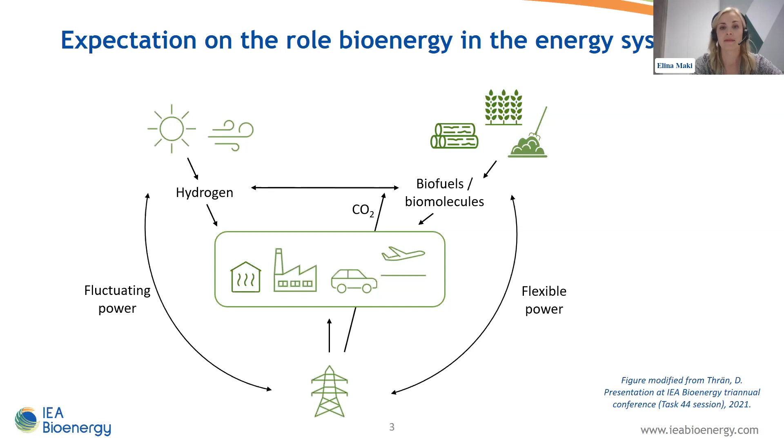It must be noted that this picture can look very different in different countries, because we have different energy systems, different market mechanisms, different biomass availabilities, and also different climate strategies. So the picture varies between countries, and as you can see, bioenergy can provide different services to the system.

When screening different technical options at Task 44 to provide flexibility from biomass, we ended up with 3 different categories. First, we have short-term flexibility services from bioenergy. Under this, we have backup or peak generation, when bioenergy can substitute or complement renewable energy production from variable resources when there is not enough available during a given time.

Then on the other hand, we also have times when there is too much renewable energy production available compared to consumption, and bioenergy can step in with negative ancillary services. So bioenergy can actually uptake electricity when there is more available than needed.

Flexible bioenergy goes way beyond short and mid-term flexibility services, and we also have long-term flexibility services from bioenergy. This basically means biomass-based energy carriers, which can be stored even seasonally and transported within the existing infrastructure.

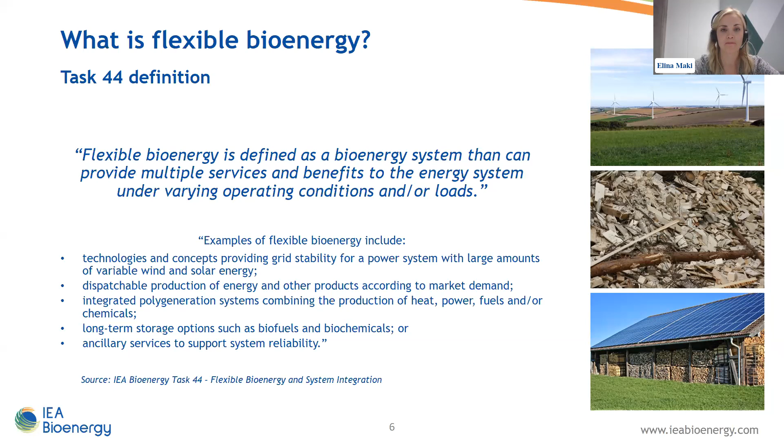With this, I will hand back to Jaap, and I'm looking forward to the discussion and presentations, as it's very important to bring together the systemic view and the end user perspectives with the technical solutions. Thank you.

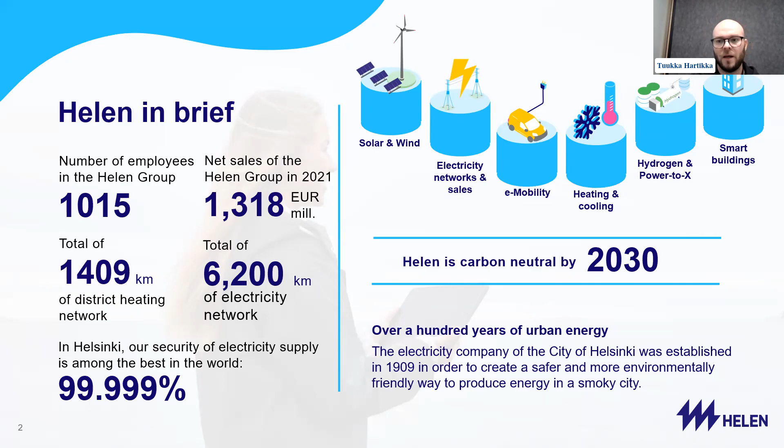If we use an electrolyzer to produce hydrogen, we always produce heat as well. Roughly 1/3 of the electricity that we put into the system comes out as heat, and this heat could be utilized in district heating networks. If you have a low temperature district heating network, you could even use the heat as such without a heat pump, or if you need to boost it up, you can have a smaller heat pump to boost up the temperature. But then you have one piece of the puzzle. So you have the hydrogen, and then you need the CO2, which you would capture from a biomass plant. With these two building blocks, you have basically the option to produce almost anything you need.

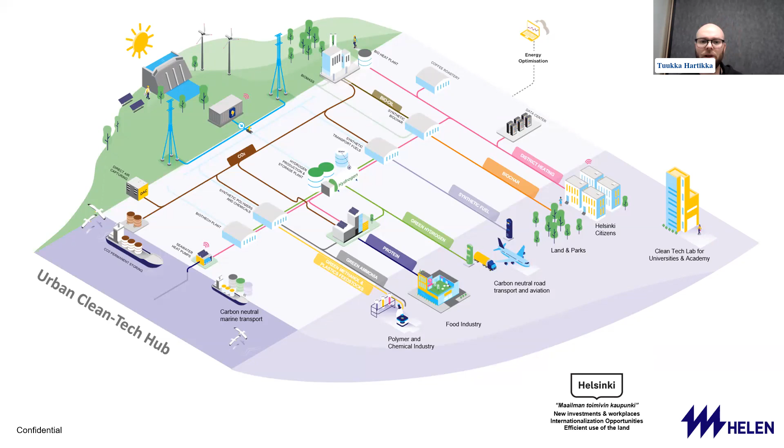And we see that especially hard to abate sectors like aviation and marine are very important sectors to have synthetic fuels for. We could also produce food from these ingredients, so protein. There's an extremely interesting startup in Finland called Solar Foods that can produce protein called solein from CO2 and hydrogen. And then, of course, you have the chemical industry that you can also apply with these pieces of the puzzle. This all could happen within one country as well, so you don't need such long supply chains as you need today. But what you need is flexibility and sector coupling. I will now present one example of how we see the topic and a couple of the challenges in this sphere as well.

First of all, to produce hydrogen with electrolysis, you of course need electricity, a lot of it. If we take an example where we have a hydrogen production unit, a 100 megawatt alkaline electrolyzer, and you would like to run it basically 8,000 hours per year, because typically hydrogen users need a quite continuous flow of hydrogen, what you would need is 280 megawatts of wind power for this system.

In Finland, the capacity factor is about 35%, so to cover the whole energy need, you need 2.8 times the power that the electrolyzer requires. What you would also produce is 30 megawatt hours of heat every hour, which is quite usable in a district heating network.

Why I mention that only 65% of the hydrogen is green is because of EU legislation, where you would most likely need to match the wind or solar energy with the hydrogen production hour by hour. So you need to basically oversize your wind assets at certain times, and then you have to sell the excess power to the grid, and you won't be able to get 100% green hydrogen according to these rules.

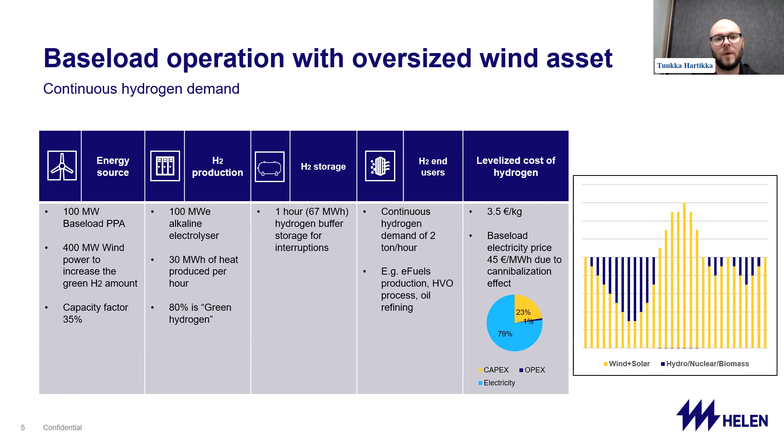If we take a third option, where we'd like to get 100% green hydrogen, producing hydrogen all the time, we would need roughly 550 megawatts of wind power supply and oversize the electrolyzer, almost doubling it, but it would only run half of the time. We would also need hydrogen storage for 11 days to cover non-windy periods in the summertime, and this would add to the cost tremendously.

With this option, we can provide 2 tons per hour of hydrogen, but the cost would go up to 6.7 euros a kilo. Here you can see that the capex cost is now what influences the total cost of hydrogen the most, with electricity being a much smaller price component.

So what this basically shows is that we need balancing power as well. We need something else together with wind and solar to balance the grid, and that will be very cost efficient. Also, the regulation shouldn't discriminate against non-fossil sources of electricity which you could use for producing hydrogen as well.

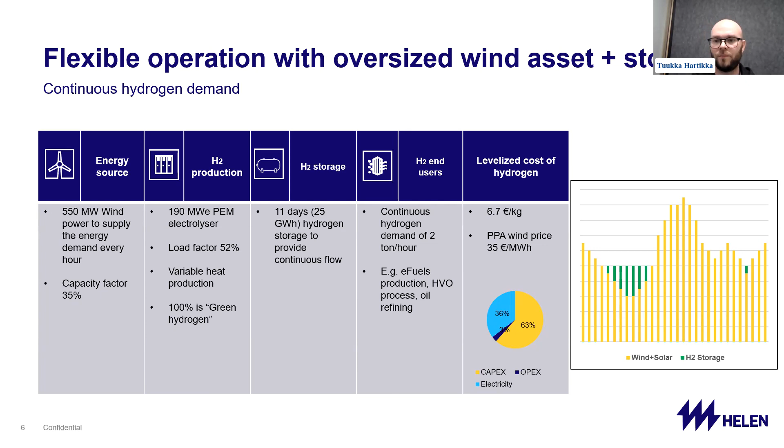That was my example, and now I just briefly want to advertise our project that we are now developing. It's called 3H2, Helsinki Hydrogen Hub, and we are developing this project in Helsinki. We have a small solar park connected to an electrolyzer, and the electrolyzer will also be connected to the grid.

The produced hydrogen will be stored in a low pressure storage, and the hydrogen's main use will be for heavy duty traffic, so there will be a hydrogen refueling station as well. But because we want to increase flexibility, we also have a small terminal to import and export hydrogen, and also a fuel cell to provide grid balancing services when that makes the most value.

All the heat produced in this system from the electrolyzer, the fuel cells, and from compressing will be utilized in a district heating network with a heat pump. By this, we can increase the total energy efficiency to about 90%. This will significantly improve the business case and the efficiency of the system by utilizing all the waste, and we hope this system we're now building will be up and running by 2024.

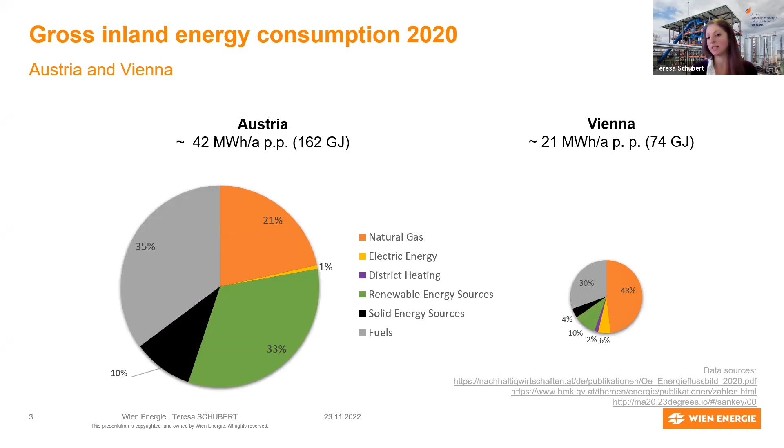So let's start with our energy consumption. Vienna is, in comparison to Austria, quite efficient - we need per inhabitant about half of the energy compared to Austria overall. But if you look in detail at the energy demand, our share of natural gas, shown in orange, is much larger compared to Austria in general. In the urban area we don't have that many renewable energy sources compared to more rural areas, and especially in heating but also electricity generation, we're quite dependent on natural gas. As you might notice, the last months were quite troublesome regarding gas utilization, so that's a pressing topic.

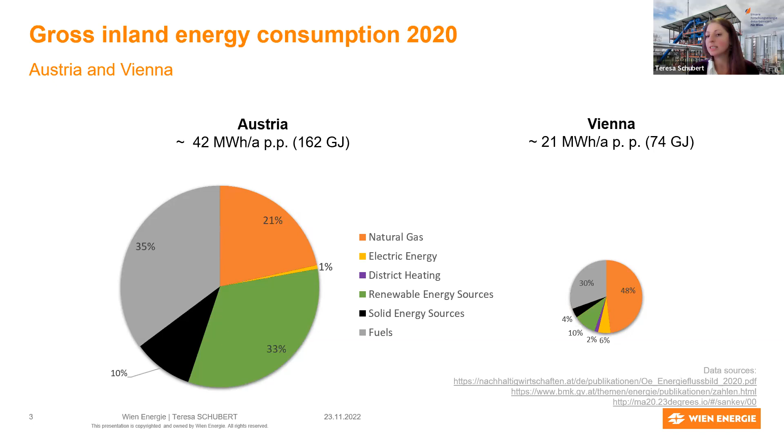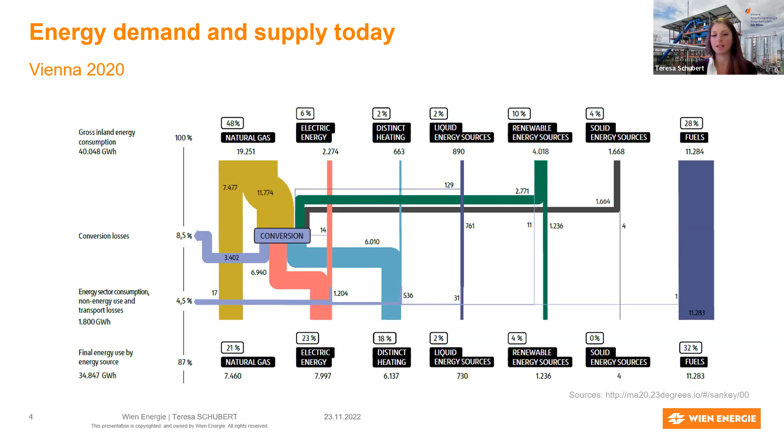So who is Wien Energie? Wien Energie is Austria's largest energy supplier.

We supply energy for about 2 million people in the form of power, gas, heating and cooling, and in the future maybe other energy carriers as well. We have about 2,200 employees, and we invest largely to increase the renewable electricity share within the city, but also outside the borders of the city. So we operate, for example, large wind farms, PV plants and hydropower plants outside of Vienna, because the rural area is easier for generating renewable electricity compared to the urban area of Vienna.

And we provide heat for about 440,000 households within the city. The district heating in Vienna is quite large, and we provide this partly by converting about 1 million tons of waste. So Wien Energie, besides converting energy in the form of gas, also operates 4 waste incineration plants at the moment to generate district heating. Keep that in mind because it will be important afterwards.

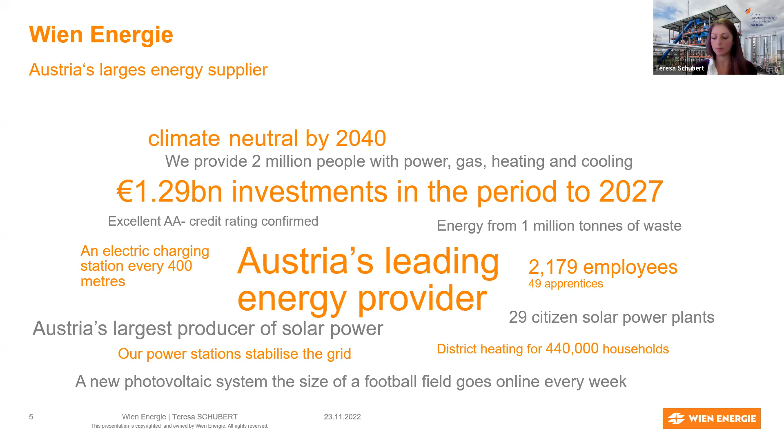So as you can see, we invest largely in the renewable electricity part, but we have to think about how the energy system will look like in the future. On the next slide, you can see how we provide this energy.

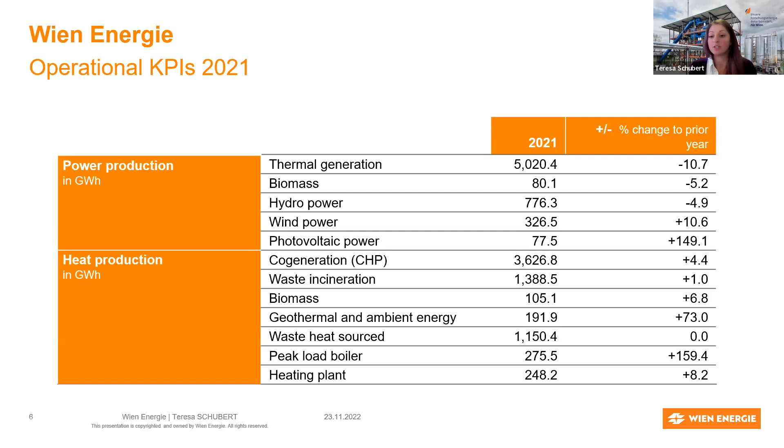So to achieve this goal, we had to think about how this system could look like, starting from 2019, from a status quo where large amounts of energy come from fossil sources. We built scenarios for how this future could look, based on some assumptions given by politics or the system itself. For example, that electricity will be fueling mobility in a major part, especially public transport, but also individual transportation, and that heating and cooling will be provided on one hand by electricity, by heat pumps, and by district heating.

In Vienna, politics is quite clear about green gases in the heating sector. So we see green gases as too valuable to be directly used in the gas grid for direct heating of boilers in flats. We don't want to waste this valuable good in sectors where other alternatives are given.

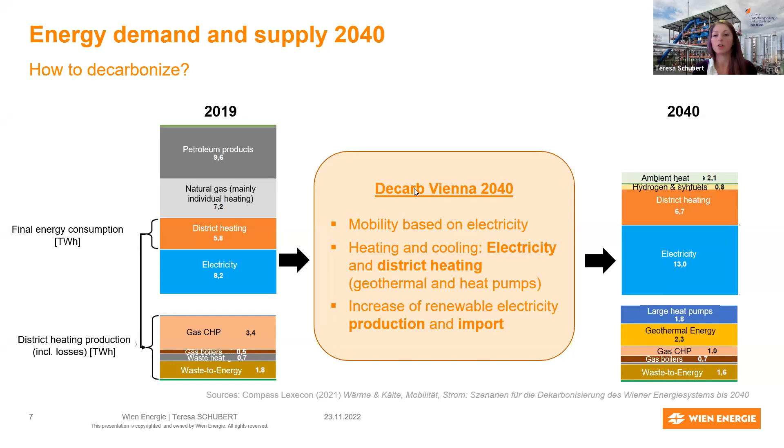These are times when the electricity price is really, really high, so it's not economically feasible to operate heat pumps. In these times, green gas gives us the flexibility to provide achievable and affordable heat by operating combined heat and power plants.

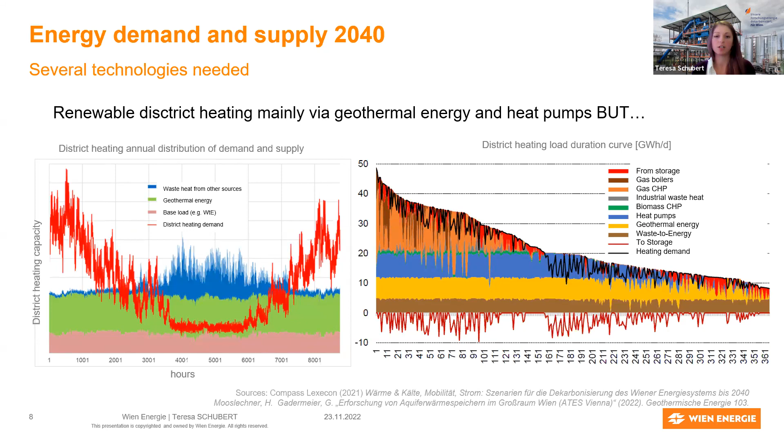So this is not only a technical flexibilization, but also an economic flexibilization option. To sum it up, we calculated in this ideal decarbonized system that we will need about 4 terawatt hours of green gases compared to the 20 terawatt hours of natural gas we are using now. It's quite a low number.

But on the other hand, there are studies, for example, for the whole area of Austria that the achievable green gas amount is about 20 terawatt hours all over Austria. So we have to think about where these green gases come from. We will need it for several applications, as I've already said: for combined heat and power plants, certain applications in mobility in a small share, and especially in the peak load times of heat generation for the district heating system. We need every option to get to this 4 terawatt hours of green gas.

So we haven't fixed yet how the shares of hydrogen and methane in this mixture should be. For example, we're testing at the moment hydrogen in combined heat and power plants to a certain share, but we will need this amount.

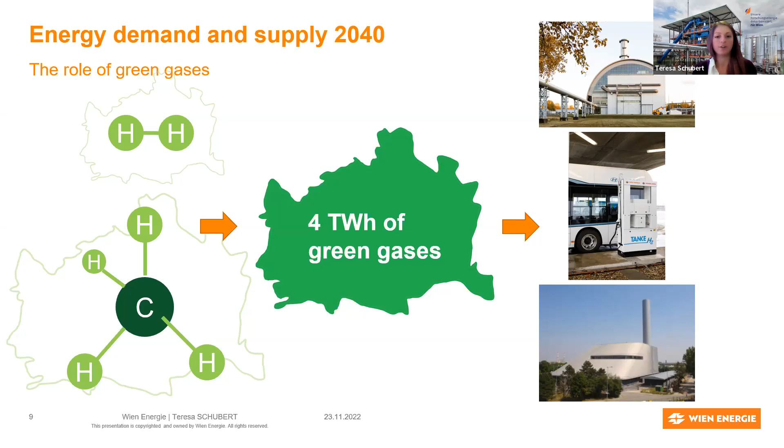So finally, I would like to talk to you about gasification and why we are interested in this technology. As I've already mentioned, we are processing about 1 million tons of waste of the city of Vienna each year. And we have heard that we will need green gases and green fuels for all these applications to achieve this vision of Decarb Vienna 2040.

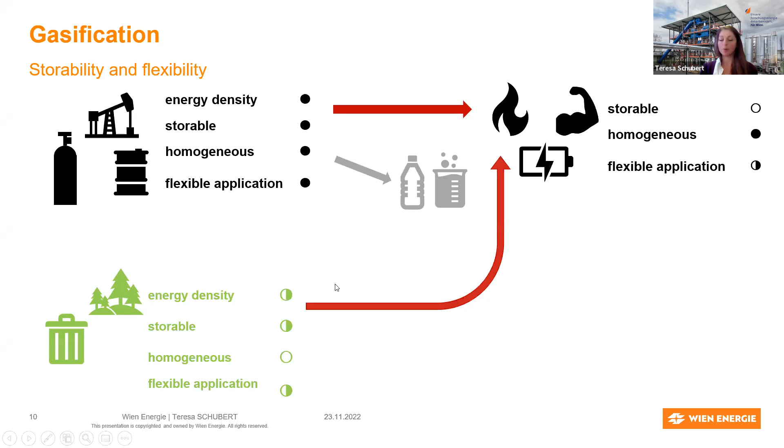And we see a large opportunity in utilizing materials what we use now at the moment just to generate heat in the form of waste energy plants, which provide base load capable energy, but are not storable and not flexibly applicable. Whereas gasification could lead to energy carriers, which are much more storable, homogeneous and flexible in application, and also compatible with the energy system at the moment, for example our combined heat and power plants.

So that's the reason why we're interested in this pathway, because we have resources which could be in the future utilized in other ways than just burning it. But we see that this technology or this process chain is not commercially available, that you have many suppliers to choose with, because we're, for example, owned by the city of Vienna. We have to do certain procedures to buy, for example, a plant.

And there are several technical risks, technical questions which have to be answered. And we don't have the right data to know how to integrate such a technology in our energy system and how we can calculate, for example, the business case.

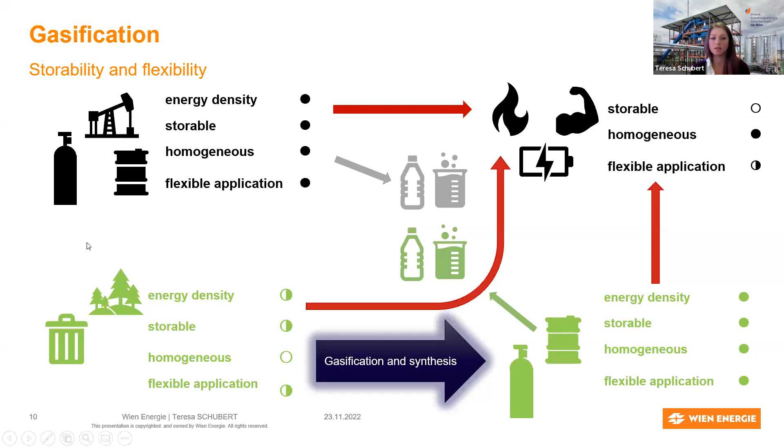That's the reason why we decided to participate in a research consortium, built under the consortium leader BEST, Bioenergy and Sustainable Technology: a 1 megawatt demonstration plant demonstrating a process chain from waste to value - that's the name of the project - gasification and synthesis as a contribution to this vision of the city of Vienna of tomorrow.

So if you have any further questions regarding the research project, I'm happy to share information about that or our vision of the city, and I'm happy to answer all the questions. Thank you very much.

Thank you very much, Teresa. Well, there is a question in the chat. People are asking, why not earlier than 2040 fully sustainable? So perhaps you can rephrase that question by asking, what are the rate limiting steps? What are the limitations not to do it earlier?

You're muted, Teresa. Sorry. I think in Vienna, from our point of view, our framework, our conditions, it's quite ambitious because we have, for example, to invest largely in renewable electricity production. The ramp up takes time. We have other issues, for example, regarding waste to energy plants. We're building a roadmap at the moment for making them carbon neutral, and it has been seen that 2040 is quite ambitious. So I think it's in our regard quite ambitious, and I don't think earlier would be possible.

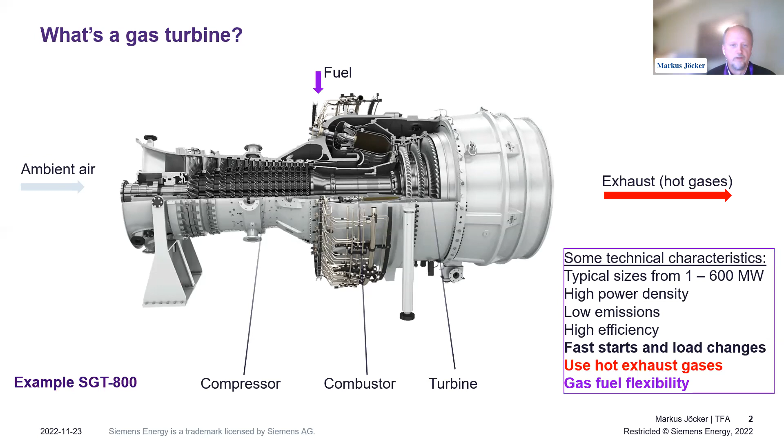So the SGT 600 to 800, we are talking about a range of between 24 and 62 megawatt electric power output. So that is maybe important for orientation also.

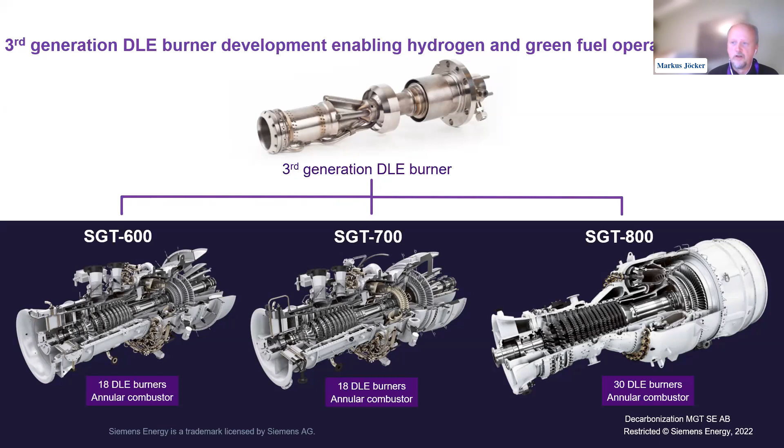Another aspect I want to highlight about gas turbines - just talking about the ones supplied out of Sweden, there are more than a thousand in the world. That means there is an infrastructure already existing which can be used to transform the energy system to a sustainable system. I think that is a value which should not be neglected. A lot of the assets which are there could be used in another way and made climate neutral.

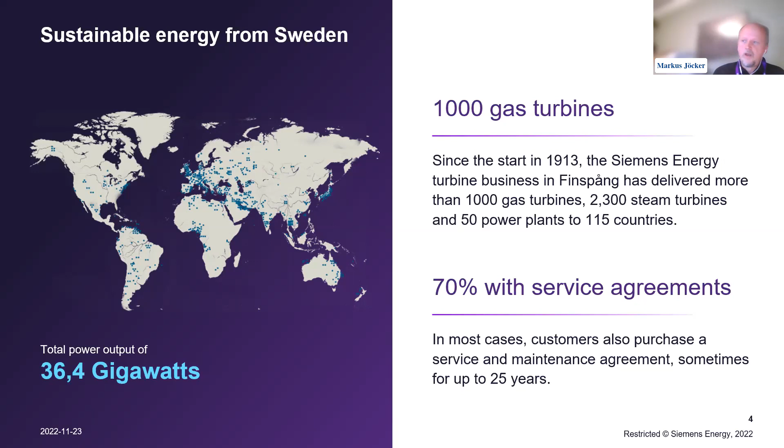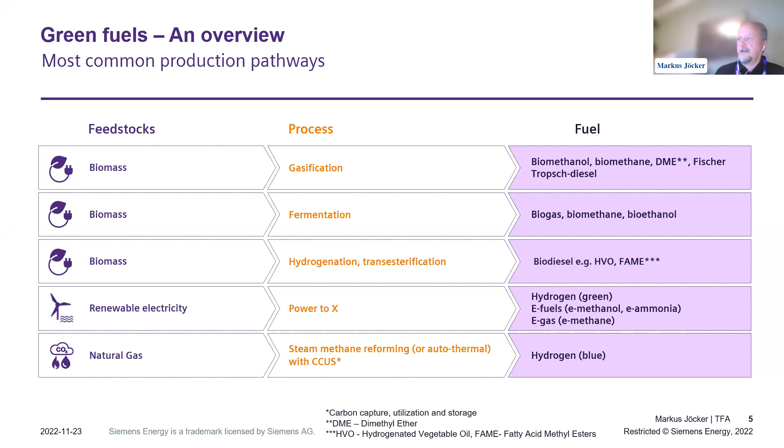Biomass and biogenic fuels are very interesting for us, but we are also looking at other fuels. Hydrogen is very important, so it is a technical challenge to reach 100% hydrogen capability. We also look at different e-fuels and other alternatives, and I will come to more details later. Just before that, I want to show the capabilities we have today. Today we can burn up to 75% volume of hydrogen in all, or most, of our gas turbines. Translated to energy content, that's about 50% of the energy coming from hydrogen, with the rest from the other gas mixed in. We have very ambitious targets - until 2025 we want to ramp this up to 100%, and we are working very hard on that technology development.

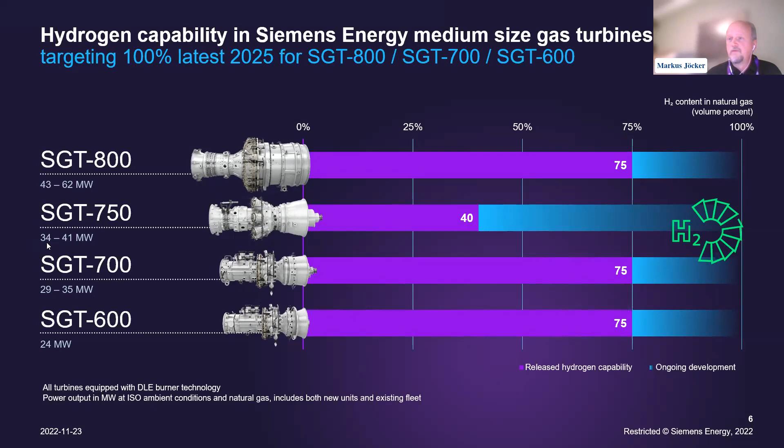I want to show you quickly the concept behind that Zero Emission Hydrogen Turbine Center. When we normally do our gas turbine tests in that testing center, we produce a lot of energy, which we partly feed into the grid, but then also waste a lot of it. Today we can use some of that energy to produce our own hydrogen and store it, and then together with the solar panels and battery storage, we can integrate it into a kind of microgrid, just to demonstrate how such a system could work. Of course it's a very small scale here, but we have successfully demonstrated how it could work and that it could be scaled up. At the end of the presentation we'll come to an example of how a scale-up model could look like.

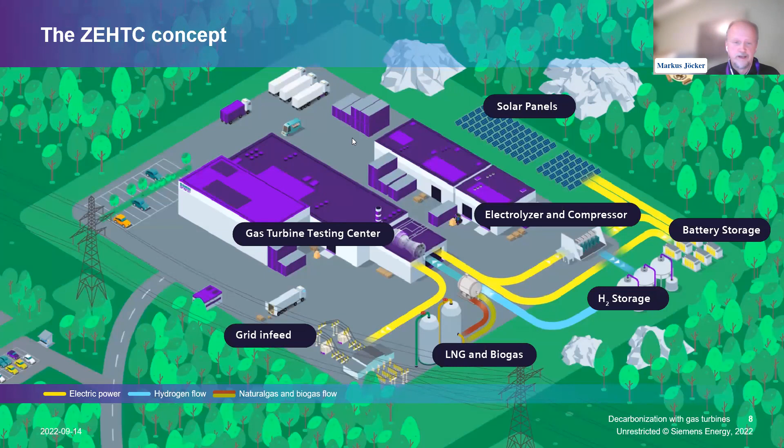Momentarily, a lot of focus is on hydrogen. Where we are today, we're capable to burn 75%, but the near-term target is 100% already in 2025. If it comes to biogas, we can already burn it today. It's normally very close to natural gas composition.

Then we also look at the ammonia track. Here we look mainly on the option to use cracked ammonia, so from a combustion perspective it becomes more similar to hydrogen combustion. We see that as a possibility once the storage size of the hydrogen storage becomes too large, and then ammonia could be another option.

But when it comes to liquid fuels, we've been able to burn diesel for a long time, and now we have also verified that we can run on biodiesel. That's a very nice option, and it's also to demonstrate that flexibility. We can use both fuels in the same engine, what we call the dual fuel option. So you can have one engine and operate it both on some of the gaseous fuels, but also on a liquid fuel. That's always very important for our developments, that we always keep that flexibility of operation. In the long term, we are also looking at other liquid fuels, methanol and ethanol. That's just a prioritization of what we think is most important right now.

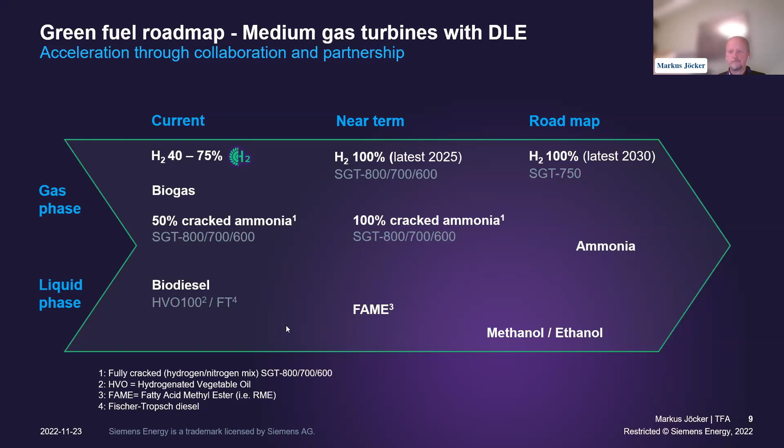Another interesting reference is the Stockholm Exergi project, where there is right now a gas turbine installed, and that gas turbine shall operate fully as a backup power plant, operated fully on biofuels, on biodiesel. That shall go into operation in 2023.

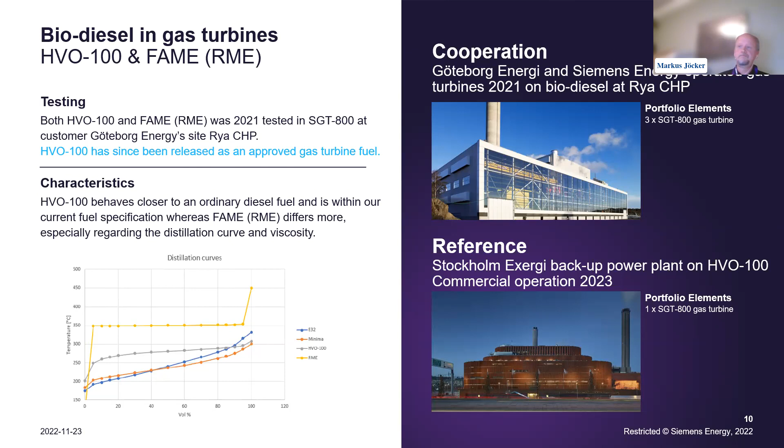All right, so some words also about the market. Gas turbines can provide a lot of services to the electricity market because of their inertia and also because of their flexibility. We also talked about using it both for electricity production and heat production in combined heat and power plants, so you get a very high value out of the fuel you put into a gas turbine.

So we think there is a place for gas turbines on the market, but it's not the same place as today. It's not a base load engine anymore, but more of a backup engine, an engine which provides different services in primary and secondary response, together with different kinds of climate neutral fuels.

I think everybody is aware that once renewables are increasing, as you've seen in previous presentations, there will be times where you have long durations without wind and solar. For shorter periods, batteries are probably the better choice, if you have maybe 4 hours to buffer. But if you talk about days of lack of energy power, then you need other solutions, long-term storage solutions, and gas turbines with different fuels can play a major role there.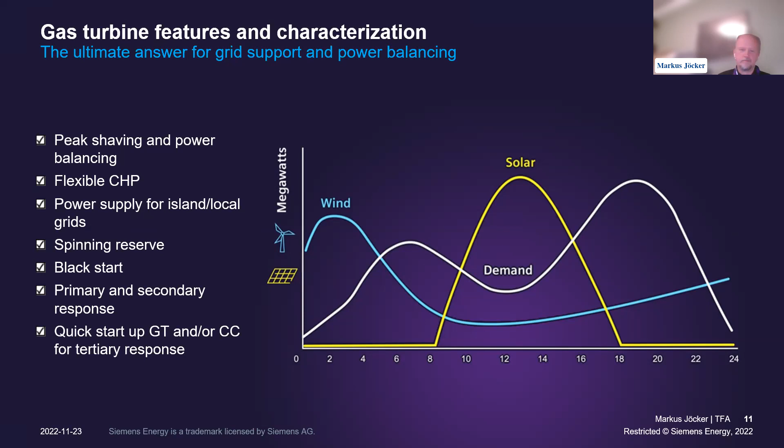I also want to shortly talk about a very interesting study which Chalmers University in Gothenburg did in Sweden. Chalmers is a partner in the ZEHTC project we have together, and they are looking at the role of gas turbines in the future, if there is a role, and how it could look like. Many of our conclusions are somewhat related to this study.

It's also interesting for this forum that the study looks specifically at the influence of biofuels on the market. There will be an interrelationship between the availability and cost of biofuels and the availability and cost of hydrogen. So for us as a gas turbine manufacturer, the conclusion is very clear: we need to provide gas turbines which can handle both, to give our customers the most flexibility to operate the gas turbines on the fuels available.

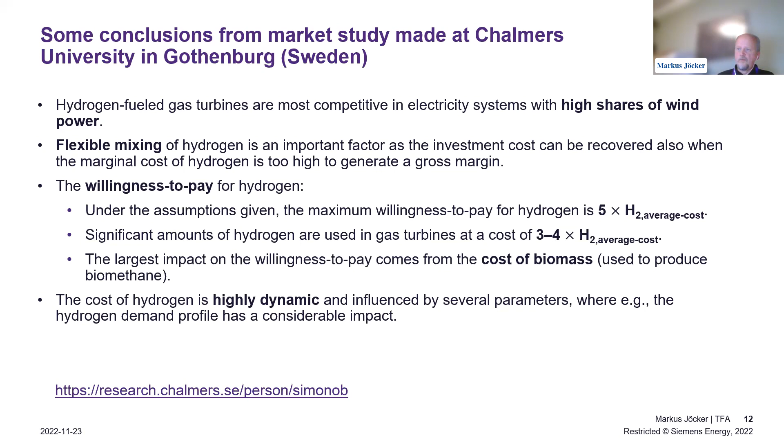All right, now I want to finish with a small study we did at Siemens Energy. Imagine a society of maybe 250,000 inhabitants, just to scale up this zero emission hydrogen turbine center to a large scale. This is just an example, and every location, every condition might be different, but we found it valuable to visualize how such systems could look.

We see that gas turbines can play an important role in more wind-dominated systems. We did this for a system with a wind park of 600 megawatt and a solar park of 300 megawatt. You would still need some battery support to buffer for short durations, but also a long-term storage, which we calculated here. With one combined cycle power plant of 89 megawatt, you would need a hydrogen storage of 150 tons and an electrolyzer capacity of 160 megawatt to make this a sustainable system.

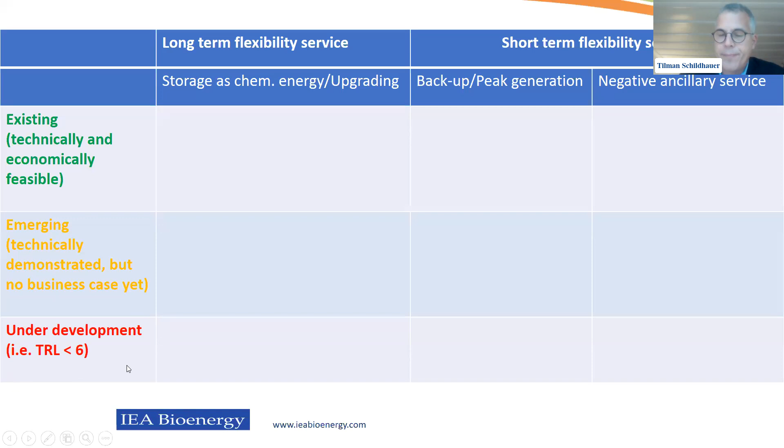If we now start with the landscape, I would like to first start with biogas. We hear way more about that before, but this is one of the technologies where everything is already quite applied and seen in many places.

So we can actually take wet biomass, convert it to biogas, mostly by anaerobic digestion. The biogas can be used right away in combined heat and power plants. There's some flexibility options. Or we could upgrade it into methane, which then could be injected into the natural gas grid or liquefied, and then use both for CHPs at different places or for mobility.

And there's clearly, if you do the upgrading, there's two options. The more classical one is I just separate the CO2. At the moment, mostly it's given to the air, but in principle, we would be able also to collect the CO2 and transport it to sites where we can do sequestration.

So that we have negative emissions by the CO2 from biogas plants. Or the other option is we can actually add hydrogen to the system. Then you need a kind of methanation reactor which converts the excess CO2 into additional methane. So these are the two options, clearly something you could do if we have more electricity than we need, and we can produce hydrogen by electrolysis. So these are the common ones.

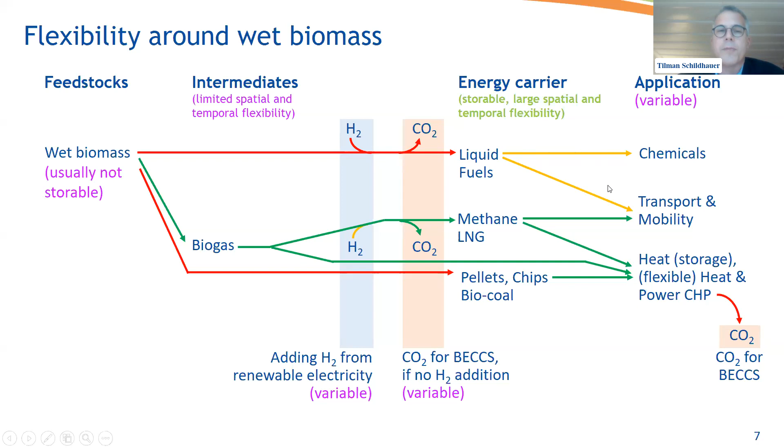If we start from wood, the other main bioenergy source which we have, then there are a couple of very classical ones. The more classical is actually combustion. So if we produce some pellets or chips and we burn them in some CHPs.

We might also produce biocoal this way, which then could be used for negative emissions. That is a very recent technology development, still under development. There's clearly gasification of wood to form product gas, and then use of the product gas in CHPs again, in gas engines, also very classical.

And something which now is really making the jump from yellow to green is the production of pyrolysis oil, which then has many different options. It could be stabilized, and it could be used for CHP production, could be used for heating. So there are many options from that side. And for the stabilization, again, there is some hydrogen needed.

If you take all that together, there's even more options for product gas. We can do, when we did the gasification, we actually have a gas mixture which is very similar to syngas, and that offers us all the options of syngas chemistry, where we either go via methanation to more methane or liquefied natural gas, or to liquid fuels like Fischer-Tropsch or methanol.

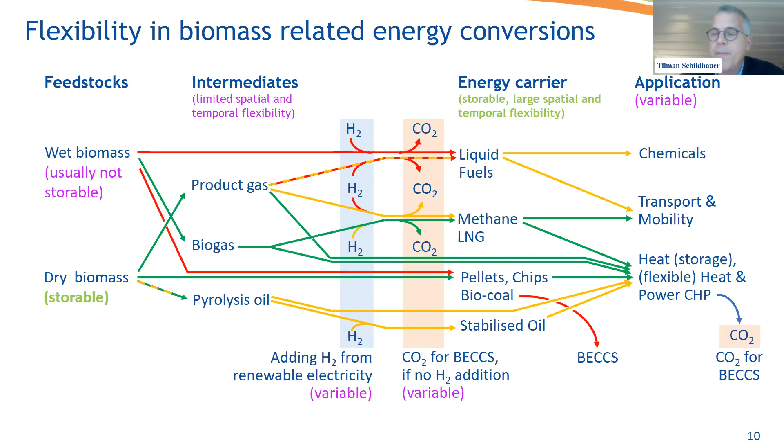If you conclude a little bit what we learned from that: many technologies exist and they work, and the ones where also the business cases work, the standard is wood combustion, which worked since ever in human history. Other business cases which work usually start with waste streams, especially those which do not burn, and all the processes where we can actually produce electricity, if you have a good scheme in place which supports the extra cost.

Then usually you have a tendency to operate them at long times, but with some additional support for flexibility, and we will hear more about that. Then that can be also used very flexibly. So it's really starting now.

Wood, as I said, usually is combusted. You can use it as a feedstock for all kinds of other chemicals, but there you're always in fight with other feedstock, especially fossil feedstock. So that made business cases, for example wood to diesel or wood to natural gas, quite difficult now. But we might see that change in the next years, because the need for security of energy supply could change the picture.

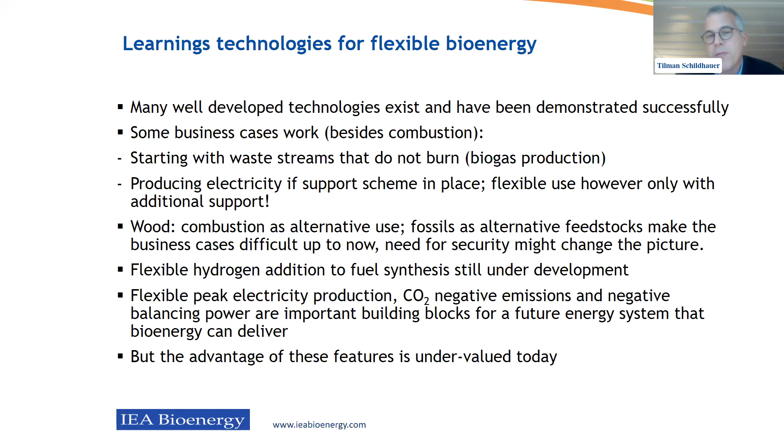The flexible hydrogen addition is something which works, but is still under development. And if you take all that together - flexible peak electricity production, negative emissions, the option to take up electricity when it's not needed in the energy system - those are really important building blocks which can be delivered by bioenergy. So in principle it's a good thing, but many of these features so far are actually undervalued what the value could be for the energy system, and we hope that's going to change in the next years.

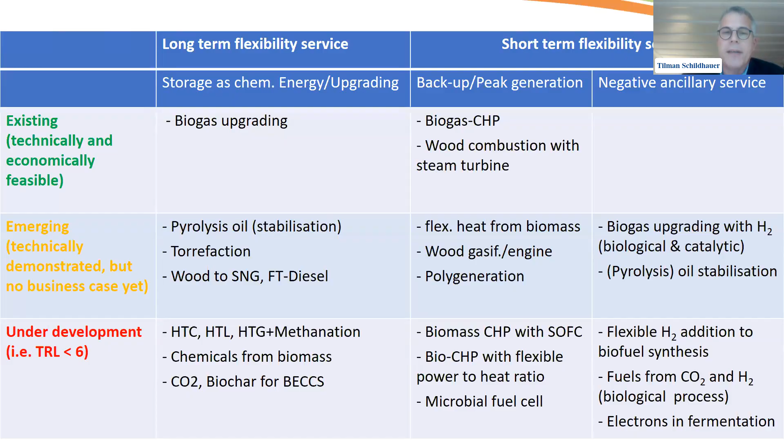There's a table with all of these technologies. I'm not going to bore you to read all that. You will be able to read the slides anyway later. I would like to end and make you aware that we wrote down many of these technologies - we made a report about that with the support of all the other tasks on gasification, combustion, biogas, biofuels, and so on. That can be downloaded from the homepage of IEA Bioenergy, and there you can read even more in detail about all these technologies. And with that, I would like to thank you for your attention.

Thank you very much, Tilman.

Well, I think it shows from the questions in the Q&A as well that it is almost impossible to collect and structure all possibilities with respect to flexibility options. You did quite a good task, but there are some remarks concerning, well, perhaps there are even more options if you dive further into the material system. I think you will agree to that - for instance, by using fibers, the fiber part of the biomass.

Yeah, absolutely. I mean, we looked here into bioenergy only, and if we can use biomass for some material use, then it's usually preferential. The best is making buildings, furniture, or using fibers for something, for some even higher value products than energy. I fully agree on that. It would be also always my first choice.

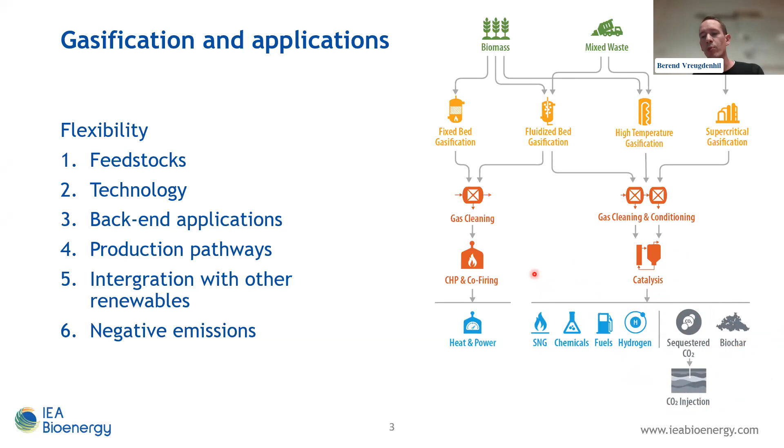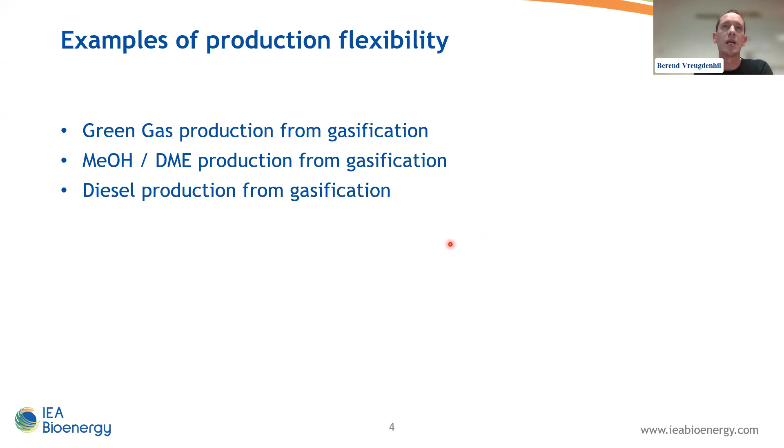For this workshop, I asked my members to provide some cases on flexibility, and I got 3 different production pathways: going to green gas, going to methanol/DME, and going to Fischer-Tropsch products via gasification. Within different projects, they evaluated the feasibility of utilizing electrolyzers to produce hydrogen and increase the yield. This turns out to give some nice results.

Within gasification, you typically start with a biogenic residue - forest residues, agro residues, or even household waste - and via gasification you produce a product gas. This product gas, based on the technology, mainly consists of CO and hydrogen. There's always CO2 and certain amounts of methane in there. If you have a direct gasifier using air, you get a lot of nitrogen. If you have an indirect gasifier, you have a low nitrogen content, and with oxygen-blown, also a very low nitrogen content.

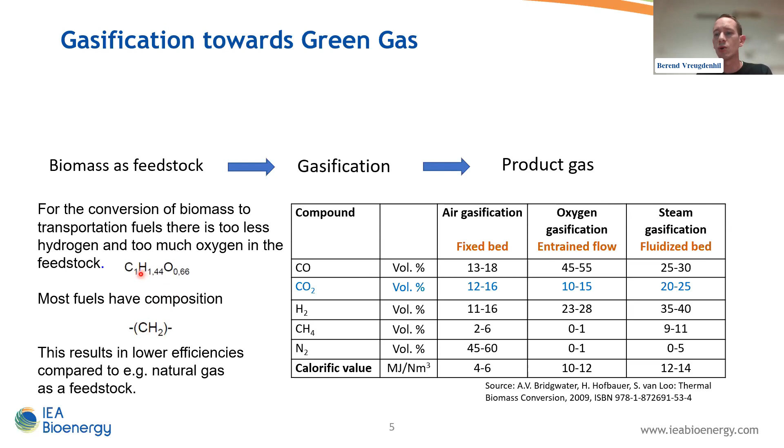If you look into the feedstock, you already see the issue. The biomass feedstock is mostly carbon and hydrogen, but also a large part is oxygen, and this oxygen will bind to the carbon to form CO2 in the process. If you go to fuels, typically for SAF, you have CH2 as the main fuel composition. If you go to methane, it's CH4. So there's a deficiency of hydrogen to valorize all the carbon - that's one of the issues.

Solving this problem is by introducing electrolysis. In this case, they evaluated a dual fluidized bed gasifier where you don't use oxygen, but use air in a separate mode to combust char, which reheats a bed material circulating in this dual fluidized bed gasifier, producing a synthesis gas. The example presented by Vienna, by Schubert, mentioned the waste-to-value process, and there they use this technology. But there again, you have a synthesis gas which is quite suitable for Fischer-Tropsch, but not for methane production.

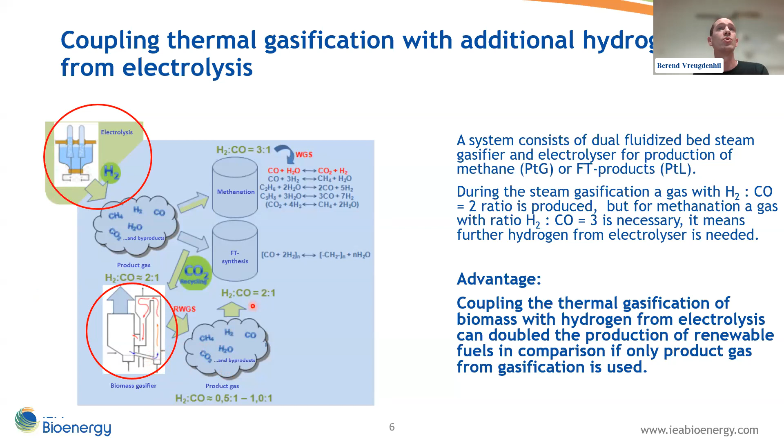So what are the advantages if you're producing a green gas? Making methane out of a synthesis gas means you really valorize all the carbon ending up in your product gas. You can more than double the product output, which leads to a higher overall process efficiency. It's also a way to utilize the oxygen from the electrolyzer, which doesn't have to be high grade, because it goes into a combustion zone and produces a separate flue gas.

The hydrogen addition also avoids the use of a water gas shift, because you have to go to a higher hydrogen-to-CO ratio than is produced in your gasifier, and by adding hydrogen you can avoid this. You can also avoid large hydrogen storage, because you're using the grid to store hydrogen, but then bound to a carbon atom. And it's also very flexible, so it doesn't rely on a steady load of hydrogen, because it can produce methane from its own synthesis gas.

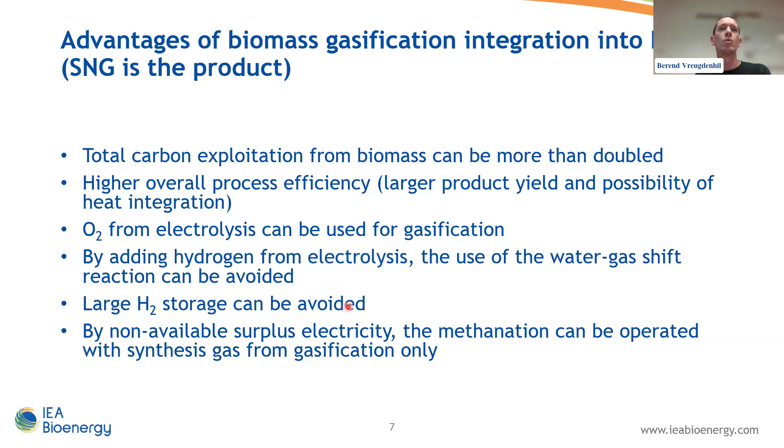It's just a way to increase your output if there's a surplus of electricity. In that sense, it's very flexible towards the operation mode of power generation and then conversion into hydrogen. And they evaluated a case.

Ilkka Hannula published this already quite some time ago, but basically you start with 100 megawatts of feedstock input, wet biomass, and he calculated that without the addition of hydrogen, you would produce about 64 megawatts of SNG or methane, which is more or less in line with what we see with the Güssing gasifier, where they produce methane, and the GoBiGas project in Sweden, which roughly had an efficiency of 65% towards methane.

But then by adding hydrogen, you could go to 140 megawatts, because the CO2 that you have to take out of your process in order to inject it into the grid can now also be converted into methane. What's interesting is that you actually need, compared to the amount of biomass, a significant amount of electricity converted into hydrogen - so you need 140 megawatts of power for the 100 megawatt biomass starting point. I think this shows the potential of storing surplus electricity in bioenergy processes.

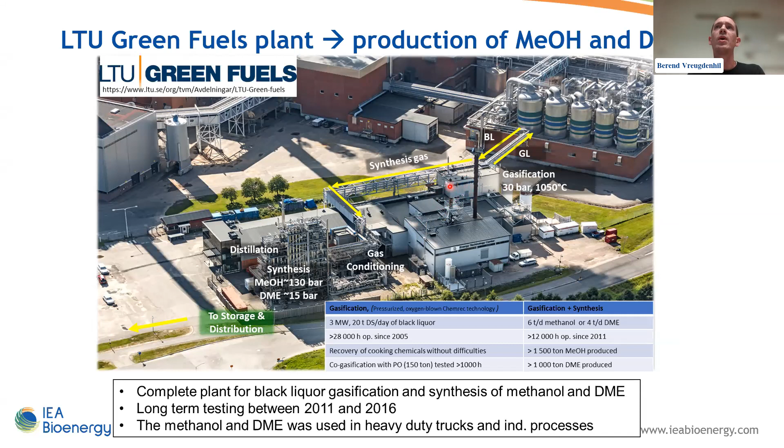And there you see what I mentioned, the flexibility towards feedstocks, that you don't have to rely on one specific feedstock. For this process, they made the same calculation, and these are the numbers. So basically, they translated it to what they thought as a feasible plant size for a pulp and paper installation, having roughly 50-50 black liquor and pyrolysis oil as feedstock.

Then they calculated that they could produce 330 megawatts of product, of methanol. And if you would add hydrogen, you roughly need a similar amount of hydrogen to valorize all the carbon that is in the product gas. But that also means that you need quite a large base load of electricity, so 800 megawatts of electricity production to produce a sufficient amount of hydrogen for the methanol process.

When I was looking at these numbers, it shows the potential, but also the challenge: do we think it's feasible that such a large amount of electricity would be available at one specific site to produce this amount of hydrogen. But the good thing is that in these catalytic processes, it's easier.

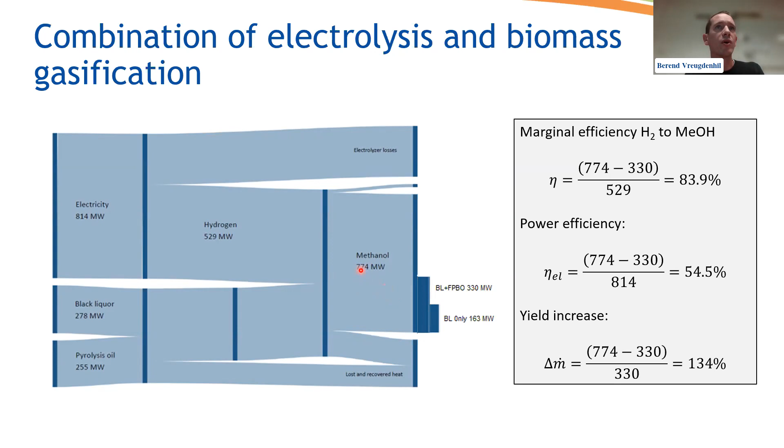It's quite flexible to operate with an increase of hydrogen by just tuning your CO2 removal in order to have the right ratio for the methanol synthesis, similar to the methane process. This is the way they introduced hydrogen in the process, similar to the methane approach, where you add hydrogen where you can valorize more of the carbon which is in the product gas.

The third pathway I would like to quickly go over is the Fischer-Tropsch pathway. It was also calculated based on the dual fluidized bed gasifier, which actually has a ratio of hydrogen to CO that is optimal for Fischer-Tropsch synthesis. So adding more hydrogen wouldn't make sense because it would destroy your ratio — you don't have the CO.

But what they did here is recycle the CO2. Downstream the gasifier, after cleaning, normally the CO2 is an inert in the Fischer-Tropsch process. In this case, they would take out the CO2 and add it to the gasifier, replacing steam. By adding more CO2 and having less hydrogen, your water gas shift reaction would produce more CO. So you would be off spec for the Fischer-Tropsch process, but that would allow you to introduce hydrogen from the electrolyzer. So this is actually an elegant way to utilize the CO2 that you have to remove from your process anyway at some point.

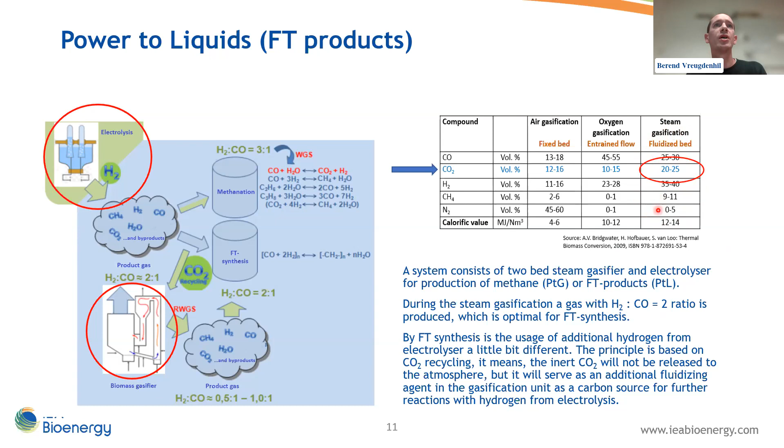This is then the starting point for the Fischer-Tropsch synthesis in this case. And the Fischer-Tropsch process is not aiming to produce one specific product. It's a whole distribution, the Anderson-Schulz-Flory distribution, which gives you everything from C1 to, well, here you see up to C30, C40 molecules, mostly alkanes. And then you have the different specs: a part gasoline, a part diesel, and you can take out the part that goes to SAF. Then you have the waxes, which typically are upgraded to produce more fuel.

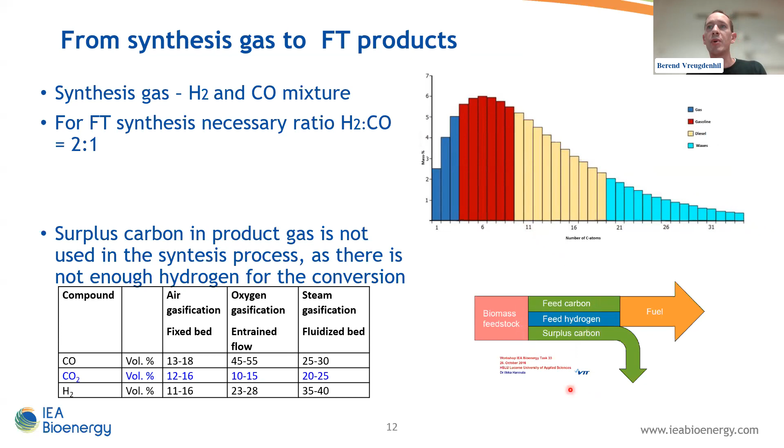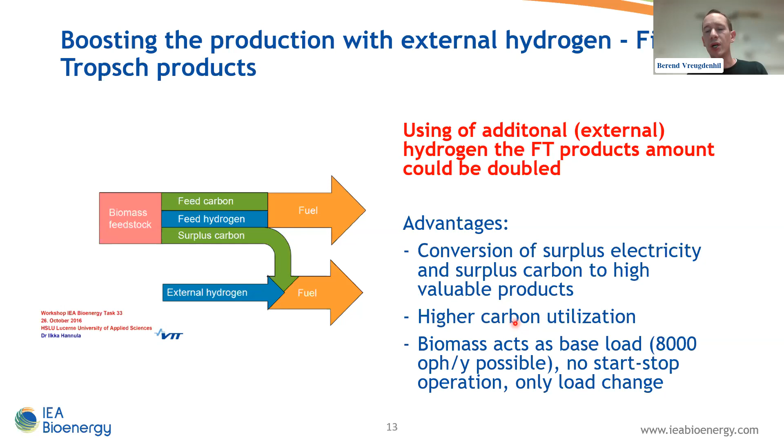This was calculated again by Ilkka Hannula from VTT back in the days. What he worked on is using the additional hydrogen to double also the Fischer-Tropsch products, leading to a higher carbon utilization. And if you look into the diagram later, you will see that in fact you need much less hydrogen to utilize it.

This is an example worked out in more detail, called the wind diesel project, where they evaluated the process of having CO2 removal and then replacing steam in your gasifier, which means your product gas is now off-spec, allowing you to introduce more hydrogen to valorize more of the CO, which is in fact shifted CO2 back to CO, convert that into Fischer-Tropsch products, and then go to diesel and kerosene.

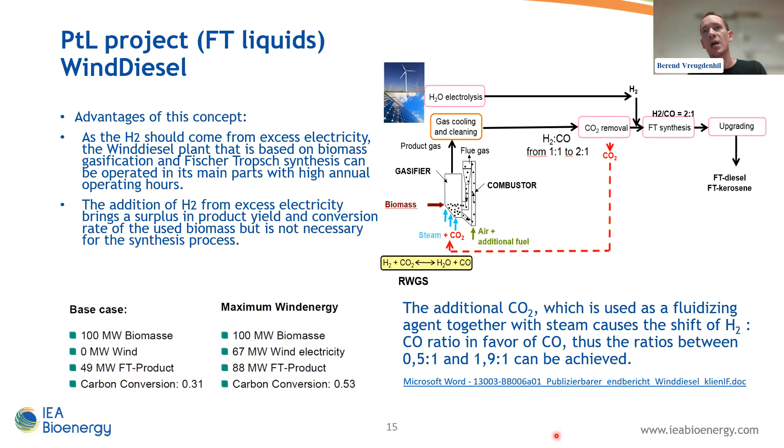They calculated the base case, starting with 100 megawatts of biomass, you would be able to produce about 50% Fischer-Tropsch products, which could go up to 88 megawatt Fischer-Tropsch products by adding electricity, in this case from wind. That was the evaluation in this project on how to integrate excess wind energy with a Fischer-Tropsch process. In the link you can find a little more information about that.

So what I did for these processes is calculate them all back to 100 megawatt thermal biomass input to get some idea on the numbers. Then you see for green gas and for methanol, the efficiency is the highest. I think in general, if you go to methane, the overall efficiency would probably be the highest. You can go up to 70%. I think methanol in this case would already be at the limit of what is technically feasible.

This, I believe, is also more or less accepted. Maybe it could be increased to 55 megawatt Fischer-Tropsch product, but there you see the limitations in yields towards the end molecule. But I found the interesting part is also the consumption of electricity needed to valorize all the carbon in your product gas - you need, compared to your biomass input, a lot more electricity to valorize all the carbon, leading to more than double the output. In the case of Fischer-Tropsch, it's actually less.

I was thinking about this, and I would say the reason is that you need less hydrogen to make CH2, a linear alkane, compared to methane as the end product. So going to methane allows you to capture more hydrogen if you have a surplus of electricity.

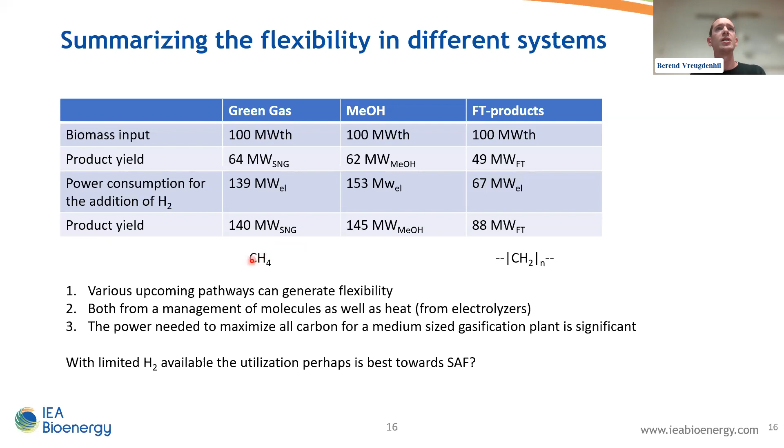Then my last slide is a concluding slide with an actual project in the pipeline, which I thought would be nice to mention as well.

Most of you probably know Enerkem. Enerkem is a Canadian company producing methanol and nowadays also ethanol, gasifying non-recyclable waste, so municipal solid waste, in a bubbling fluidized system. They have announced several plants in Spain, in the Netherlands, but the one at the top of the agenda is in Varennes, Canada, where they aim to build a standard Enerkem unit coupled to an 87 megawatt electrolyzer to supply hydrogen and oxygen for the system, which would not be feasible in Europe, they say, because power prices in Europe are way too high - and in Canada the electricity price is actually on average 4 to 5 times cheaper than in Europe.

So using electricity in Canada to produce hydrogen actually makes sense. By doing this, they valorize much more of the carbon, so they won't have a CO2 outlet, but they aim to produce a maximum amount of methanol from this plant. I think this is actually a nice example of where it could go with regards to flexibility.

Perhaps you can look at the Q&A for some additional questions. And then we go over to another set of technologies based largely on digestion, so the biogas systems. Here an overview of the possibilities in terms of flexibility will be given by Jan Liebetrau. He's from Rytec in Germany, head of the department of consulting and research, and also the task lead of Task 37 of IEA Bioenergy on biogas. He will give an overview of flexibility options, and this presentation is entitled 'The Integration of Biogas Systems into the Energy System.' Jan, the floor is yours.

Thank you very much for the introduction. I hope you can see and hear me clearly. Yes, it's working fine, and also my presentation, I assume.

We will discuss some issues around technical aspects of flexible plant operation. I would like to focus on the biogas application, which is factor 1,000 smaller than what we just have seen in the presentation before. So biogas plants tend to be much smaller than the plant size we just heard about. My name is Jan Liebetrau, and I am task leader of Task 37.

I would like to tell you a few things about Task 37, Energy from Biogas. We have 16 countries taking part in this task at the moment, and you can see on this slide the topics we are dealing with within this triennium. If you are interested, you're welcome to contact me, and also check our website, where we have all our products. There's also an interesting newsletter we publish every month, so feel free to get informed about biogas on our website.

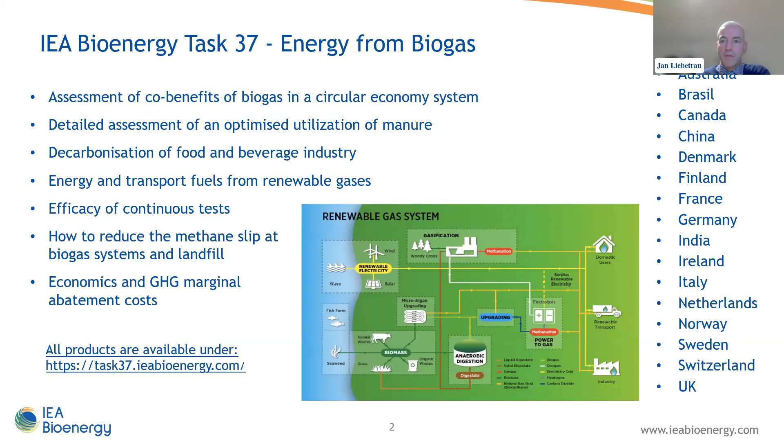I would like to give first a short introduction on the context of flexibility within biogas systems, then highlight some technical aspects for flexible plant operation, economics, give you some examples, and then last but not least, the conclusions.

Biogas plants have a lot of options to operate flexibly. Berend has already mentioned a few. It starts with the substrate, and it comes also on the utilization side. I will focus today on electricity and heat production from biogas facilities.

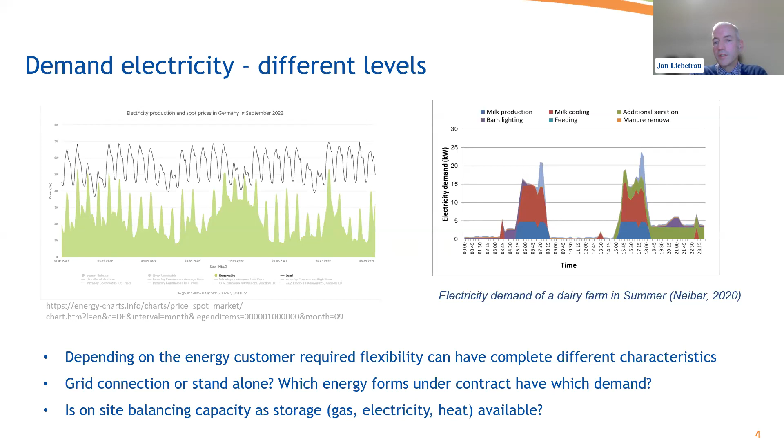A whole different story we have when we come to heat demand. We have already seen that in the example of Vienna in the previous presentation. Heat, in particular when it comes to the heat demand of housing, has a very distinctive seasonal pattern, and this is a whole different story than electricity. So if you have a CHP application and you have to serve these two masters, then you have to make sure you have an operation which is able to answer to the demand on the electricity and also on the heat side.

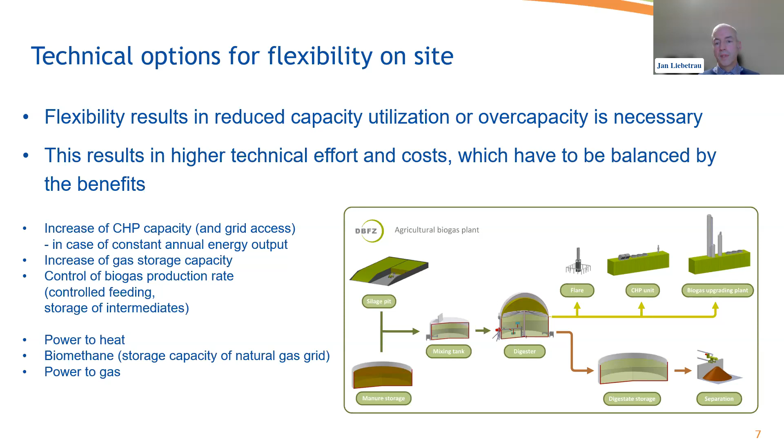When you want to flexibilize your energy output from a biogas plant, the standard answer would be to increase the installed CHP capacity and limit the hours of operation of the overall capacity. That means you have an over-capacity which you have to install. This results, of course, in a higher technical effort, higher CapEx, but also OpEx. These additional costs have to be balanced by the benefits of such flexibilization. You might also be forced to increase the upstream capacity - for instance, gas storage, or even the gas production rate of the process - in order to balance out the changes in gas demand when you convert the gas in limited hours per day, per month, however you decide.

When talking about flexibilities, there are two different qualities conceivable. First of all, you could say, okay, I know that in the morning and in the evening we have a peak in the electricity demand, and I will simply switch my plant on and off during the hours per day where most likely the demand is highest.

So these are two different stories which result in a completely different demand or requirements in regards of the control of your system.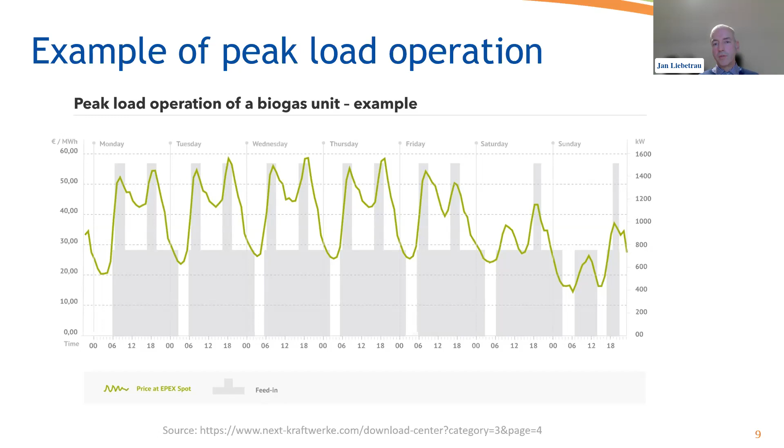When it comes down to the technical questions, a CHP which you might need to start and shut down once or twice a day has, of course, some other technical challenges than a CHP which is operated 24/7.

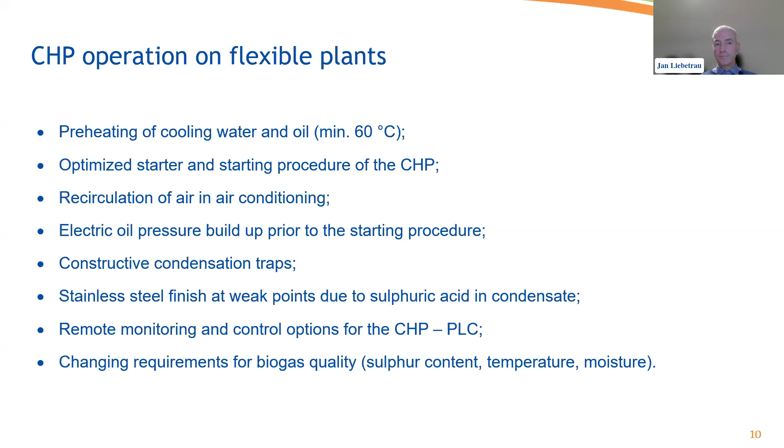I just showed you a possibility for operation where two CHP engines have been installed on site. But the decision of whether you go for several CHP units or one CHP unit also has an impact on the overall efficiency of your plant.

If you have a larger engine, these larger engines tend to be more efficient than smaller engines. This is the first thing. Second, you can imagine operating flexibly by reducing the load, moving into part load operation of a large engine, or you could do this by switching your engines on and off.

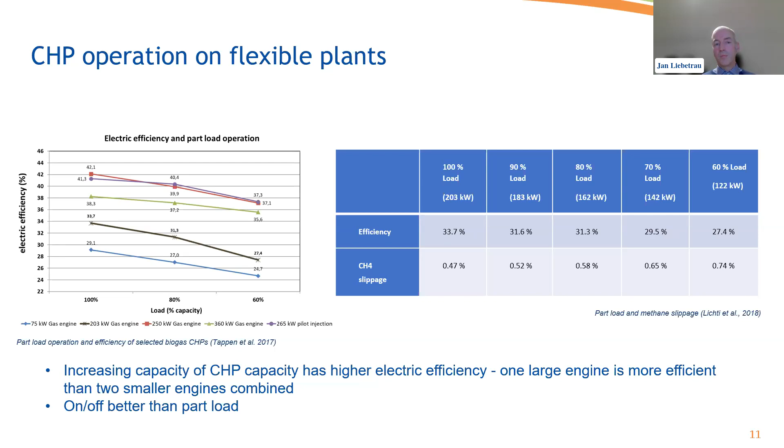So if you go for the decision: first of all, one large engine is more efficient than two smaller engines, and on-off operation is more efficient than part load operation.

Moving upstream now from the CHP and looking at the gas storage: gas storage is installed on every biogas plant to handle the deviation between gas production from the biological conversion process and gas utilization. Standard is that it can handle a few hours of CHP operation, and this gas storage capacity is usually limited.

Now, if you want to go for a quite large overcapacity, the balancing capacity needed is much larger than with 24/7 operation. Then you might need some additional measures to improve your gas management. You could start by increasing the gas storage capacity. The precision of your sensors for the filling level also has to be increased.

Transportation of the gas within the gas storage domes might be upgraded, as well as the dimensions of the gas transportation lines and the dimensions of gas treatment. In particular, gas drying soon comes to its limits when it needs to handle suddenly twice the capacity, as with 24/7 operation.

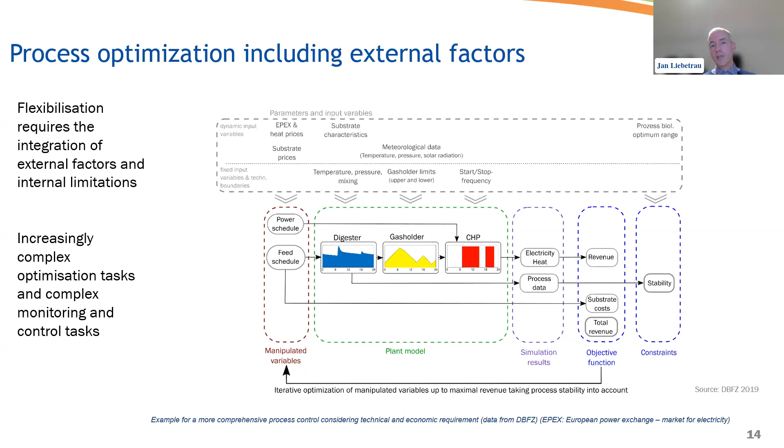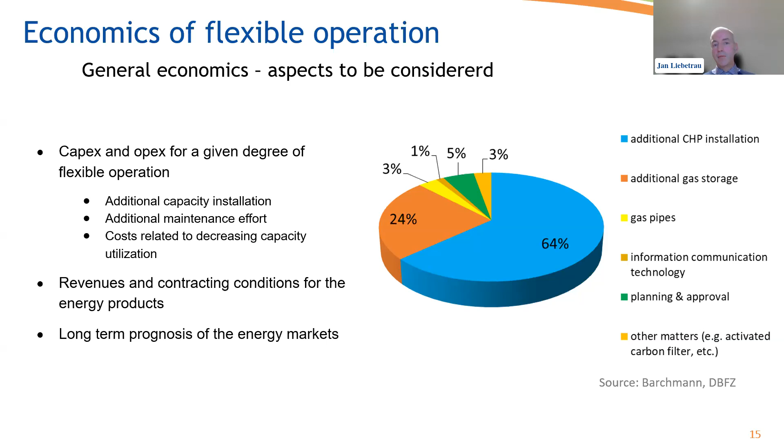Now I'd like to talk a little about the economics of this flexible operation. As I've said, the standard answer to flexible operation on the biogas plant is increasing the CHP capacity, and the CapEx for this dominates the additional costs of such a measure. But there's also additional maintenance effort, and this overall package you have to handle when you increase capacity and flexibilize your plant has to be paid back by the revenue.

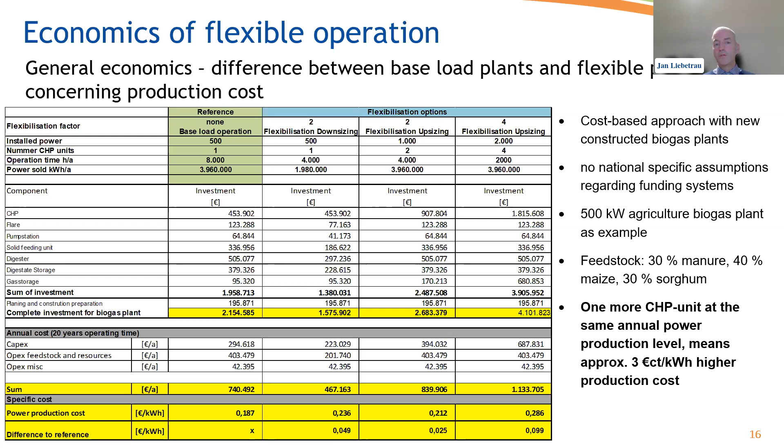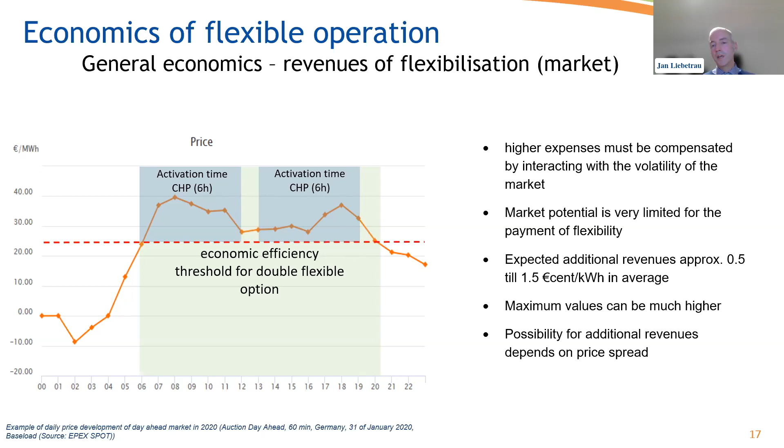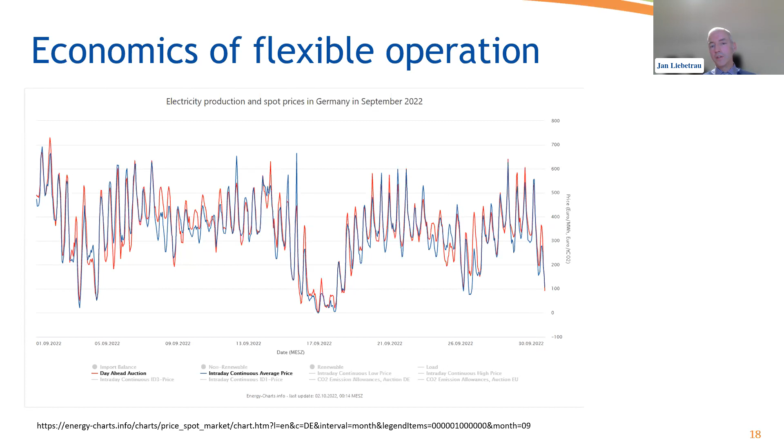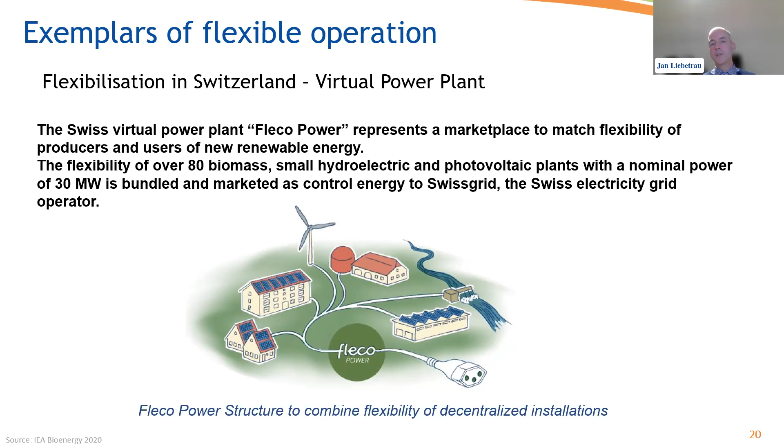Another important business case is the so-called virtual power plant. We have here an example of a Swiss virtual power plant called Fleco Power. A few years ago they had bundled around 30 megawatts of power plants. What such a virtual power plant does is collect and combine different energy suppliers, selling this bundle and its characteristics to the energy market. With this increasing capacity, they can have a whole different impact on the market than a single energy supplier.

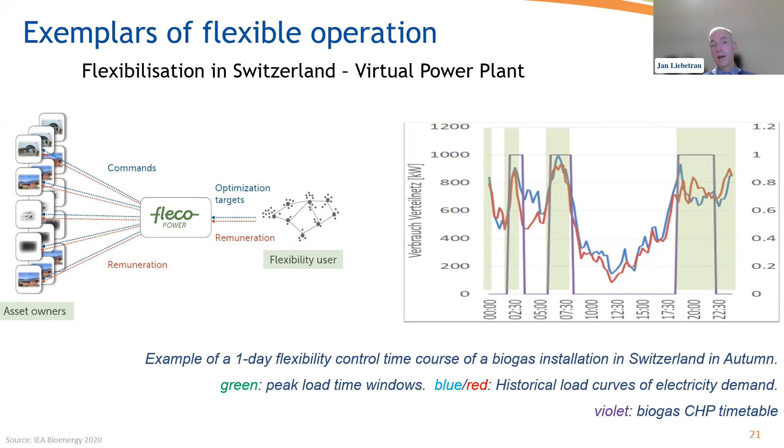There's also an example from Germany I wanted to highlight, which shows the increasing relevance of these markets. They started operation in 2009 when this virtual power plant was founded, and now have almost 15,000 electricity producing units under contract, with a capacity of over 11 gigawatts already controlled and sold to the market. I think this is quite an impressive number, showing the relevance of these businesses now and in the future.

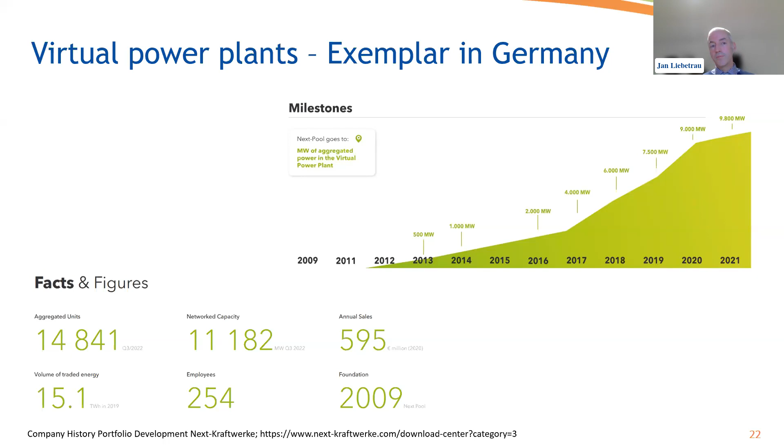To sum up, the perception of the role of biogas has changed. In the past we talked about treating organic waste, and energy supply has become increasingly important. But now we're talking about the flexibility of supply, because wind and solar have an impact on the energy system which has to be balanced out somehow. Bioenergy can contribute to that. Bioenergy can provide energy at will, and biogas applications have shown that quite impressively. To my understanding, this will be the future of biogas.

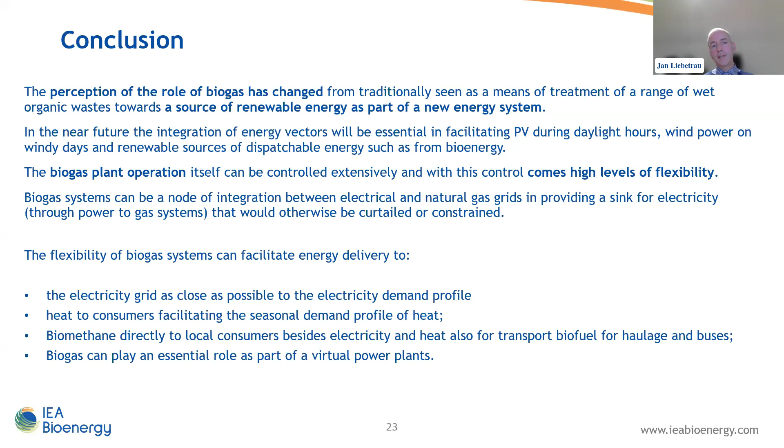If you want more details, I recommend a technical report published by Task 37, which is also available on our website. I'm done with my presentation, thank you for your attention, and I'm happy to answer questions that have come up.

Thank you very much, Jan. It's never the easiest task to be the last speaker, but I think you did a very good job giving an overview of what's happening with respect to biogas systems.

I think an interesting notion is this development from a biogas plant being a treatment plant for organic waste, now developing into flexible units for energy production. I can imagine that also has quite an impact for the owners of these plants. You already mentioned the concept of virtual power plants - could you shed some more light on that? Traditionally biogas plants were placed with farmers and are still placed in farmer communities. In terms of management and control, have there been considerable developments over the last years?